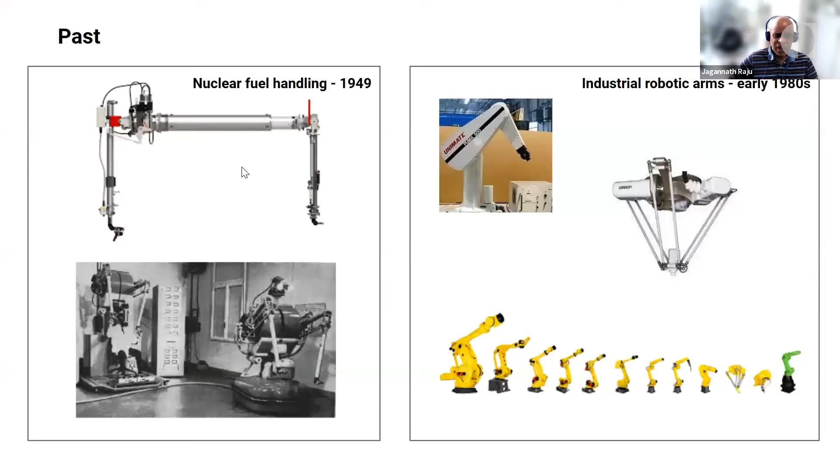In terms of geographical context, mainly it's going to be global. I will dwell a bit on the Indian context, and I have consciously chosen applications in agriculture to focus on in the Indian context, because all the other cases, our use in India just mirrors what is done abroad, but just on a smaller scale. So it doesn't make any sense to really do that on the industrial level. But I think our agricultural space is quite different from what you will see globally, and that's where it makes some sense.

So starting with the first slide, I think the credit for the first really what you could call a robot, I mean now you could call it a robot, is what is the most dexterous limb that we have is an arm.

There was a group called Central Research Labs in 1949, formed by a team of 3 people who built these master slave manipulators to handle radioactive fuel. The left side of this robotic arm is the master, which a person handles in a very safe area, and all the transmission happens through that through-tube to the right side, which handles the radioactive fuel. This was a way of protecting people from the radioactive impact of handling radioactive fuel.

It was purely mechanical. There were cables going through from one side to the other. One would be surprised that even with cables you could get a sense of touch - if you gripped something there, you would feel it on your side that you had gripped something. It all depended on the stiffness of the transmission, and it was pretty good.

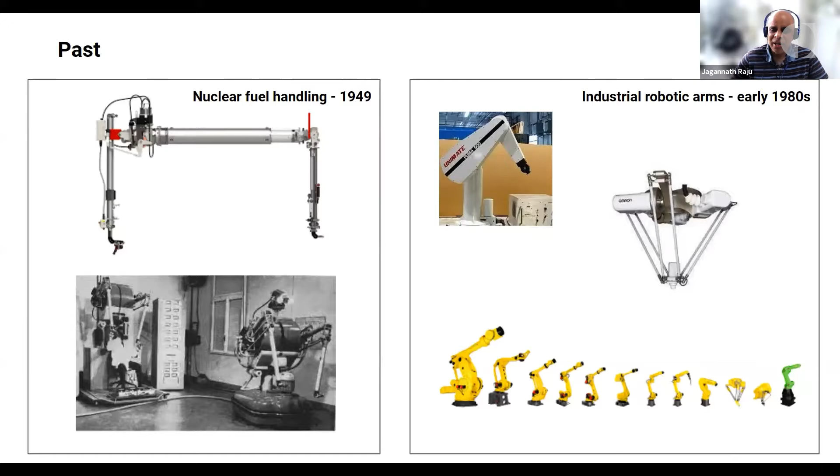So all this portfolio is there. The reason I've put all this in the past is the Fanuc arms now are a bit different than they were 10 or 15 years ago. They're maybe more lightweight, they look more sleek, they use more modern components, but otherwise functionally they're almost the same, which is why I consider that in a sense to be the past. Next, Siddhant.

I think the autonomous vehicle thing actually started with the DARPA challenge, around 2005 to 2007. If you look at the image there, you can see how many sensors were on a vehicle for it to try to complete the challenge. This was a challenge where it had to complete the entire route, somewhere in the western part of the US, without any manual intervention. It was successfully done in 2005, and then multiple teams completed it in 2007.

Then there is the Boston Dynamics Big Dog, which is viral on the internet - everybody has probably seen videos of it. Again, I put it in the past because there are different versions of it now. It was built for defense applications, and as far as I know it's a shelved project at this point, but it was the beginnings of legged locomotion of the kind you see there. It's completely integrated, there are no tethers anywhere, and it carries its own power source.

The other one below that is, again, iRobot's PackBot, dated around 1998. iRobot sold their entire military division in 2016. I think somebody else still sells and markets it, but there's not too much. There are many other things that have come up for bomb disposal and stuff.

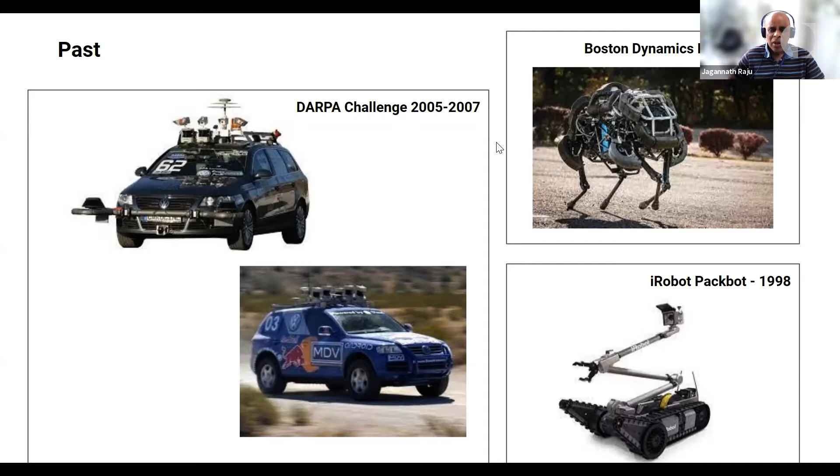I'm going to go off track a bit and talk about Hollywood, which gave a lot of people their first idea of what robotics could be. I'm not sure if anybody in the audience remembers the movie Jaws, unless you're my age. Jaws was interesting because what they used for filming was actually a mechanical shark, which had all the movements and everything inside. That picture shows how many mechanisms were inside to pull off very natural motions that a shark would have.

And it was used extensively. I think they built 3 or 4 of them for the filming. It's probably still there in Universal City if people go and visit.

The one which had more appeal was probably Terminator, because it went through a whole series of them. You can see how highly detailed it is, really the beginning of animatronics. It may not have been autonomous, it was still choreographed, but the mechanisms they could put together made it realistic, where the eyes would blink and glance sideways and all that kind of stuff.

I believe right now this prototype that was built is up for auction somewhere. I've not checked who bought it, but it's available for enthusiasts who want to see what was used in that movie. Some people may ask me, what about Star Wars?

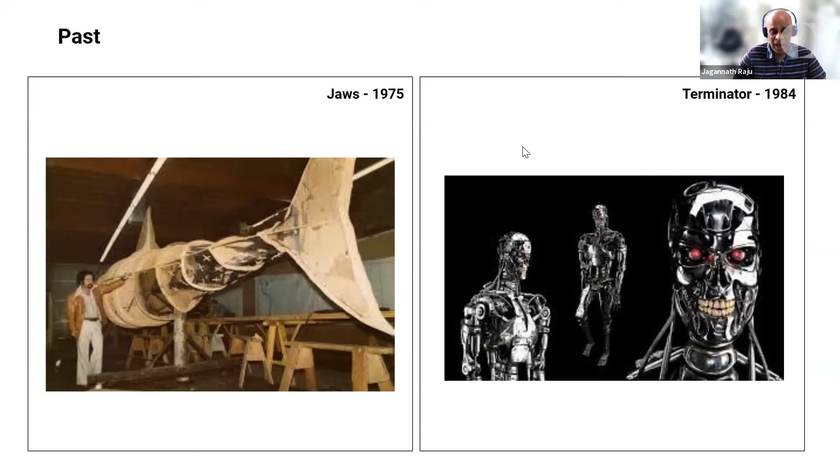And I think that impact from Hollywood actually grows further as their capabilities grow. But a lot of it has now shifted to simulation and computer graphics rather than actually building these prototypes. That's the transition that has happened, which is why this is again in the past.

This one I had a question mark about when I put it in the past. I'm now going to a small context which is Indian, and I've actually been involved in some of this. Coconut harvesting has always been a profession in the southern part of India, so families taught their kids how to do it so they could continue the family profession. Of course, with migration and all, there are very few people left in the southern state of Kerala now willing to climb trees to harvest coconuts.

So the Kerala government has been looking for many years, at least 10 to 15, for solutions. When they first talked to me, it was almost 15 years ago, and they've been trying to build these solutions. What you see on the left is actually a wheeled vehicle going up.

The question, first of all, is about the wheeled vehicles. For people who've done the analysis of this, coming from an academic background, you'll understand that the minute you do a wheeled vehicle and try to grip harder, you need more torque. And the minute you need more torque, you need a bigger motor, which makes it heavier. So I've never seen one of these work successfully, but people have persisted with it.

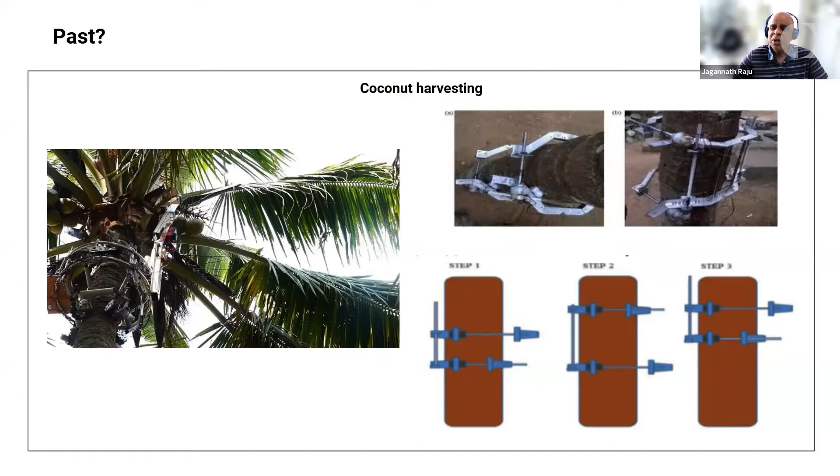Indian industrial robotics adoption is not very high compared to global levels. Primarily, auto companies use them for welding and painting, and affordability has been the main issue. Only big companies could afford it, so it's on a much smaller scale. If what goes on abroad goes on in India, you will see industrial robotics on the shop floor, but mainly for welding and painting.

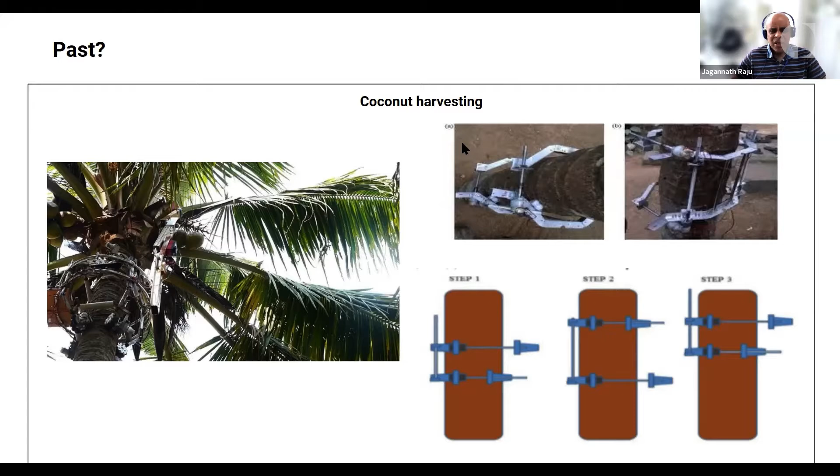So from here, Siddhant, can you go next please? So I'm moving to the present.

So what has happened in the industrial robotics space? As I said, all of them have been conventional robots or robotic arms. The new buzzword in robotic arms is something called a collaborative robotic arm, or cobot for short. This was pioneered by Universal Robots of Denmark around the mid-2000s. Universal is now owned by Teradyne of the US, acquired about 5-6 years back.

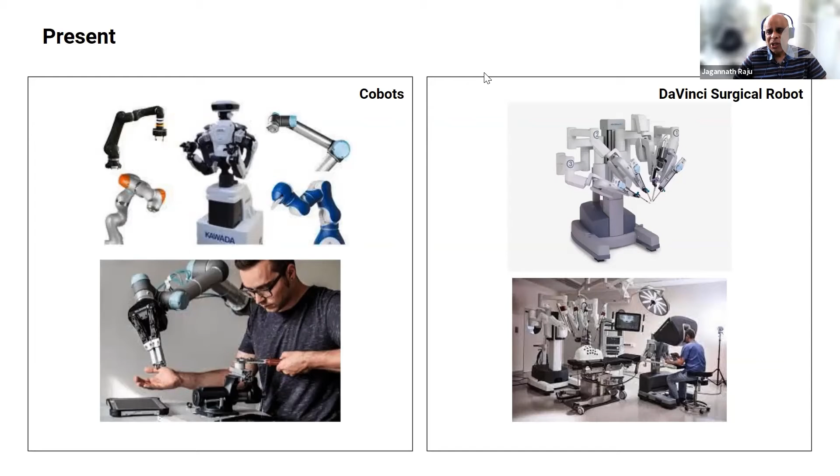What one means by collaboration is what you see in the picture below: a human would work next to the robot without feeling any sense of danger that the robot would collide and injure the person. The human is doing a task that's probably much more difficult for the robot to do, and the robot is doing the task that's much easier for it, a very repetitive task. It just brings it to the person, who takes over and does something else.

This is the first level of collaboration that people are thinking of, where you prevent any kind of serious injury. Collision still happens when it happens, but the collaborative robotic arms are designed to sense the collision and drain all the energy out of the system so that you don't injure the person.

As we move to the next level, people will come up with sensing systems. They're already there, but they haven't been built into the system yet because it requires integration from many sources. That will be the next level of collaboration, where they will know each other's presence and won't collide. The robot will take evasive action if it senses a person in the way, and then will work out a new path autonomously, saying it needs to go around because this person's hand is in the way. So there are many manufacturers of cobots now.

Since 2005, every major company in the world is now producing collaborative robots, and its use has spread like wildfire. It's no longer used only in industrial applications. Now people use it for flipping burgers, putting toppings on pizzas. It's only one's imagination that constrains what you want to do with it. This space is growing at maybe a 50% growth rate year on year for the next few years, and is really the hot space in the robotic arm field.

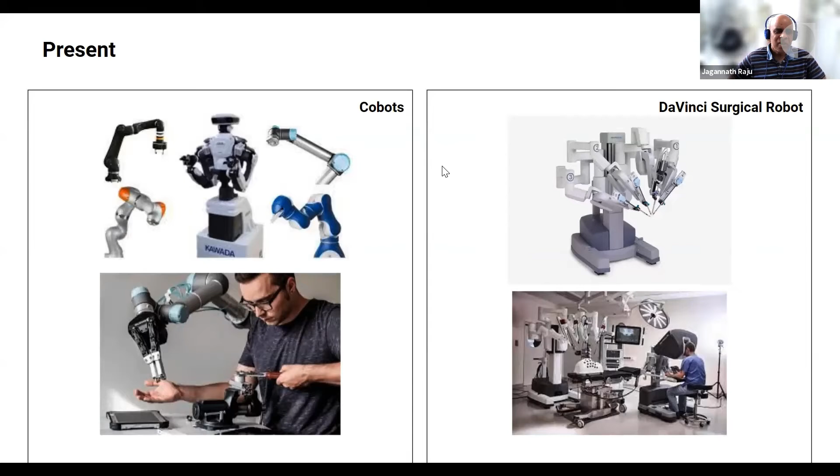Another space that is actually booming is e-commerce. E-commerce means everything you buy is in a warehouse, hopefully close by, so they can ship it to you in a day. If not, they send it from other places. There is no way that with the current e-commerce range of sales, this could be done humanly. So you will see a whole bunch of mobile platforms running all over the floor, carrying pallets from one place to another. Everything is integrated.

The first company that did this was Kiva Systems in Boston, which was acquired by Amazon. It's now Amazon Robotics. It's graduating to where now they're starting to put robotic arms onto the vehicles so that not only can it run around, it can also pick stuff from shelves. Not that prevalent yet, but I think it will slowly pick up as the need arises. It's much more expensive than just having that mobile platform, so there will be cost issues related to that.

That's in warehouses. In homes, iRobot's Roomba has been around for, I don't know, 20 years now. It's again a company that came out of the Boston robotics ecosystem. I never really felt it would have much of a market in India, given the kind of environments we have. But you would be surprised - when the pandemic happened, all the iRobot models in India went out of stock. You had to wait, or find somebody you knew in iRobot to give a call. People called me up and said, do you know anybody in iRobot? I said, I do know people in iRobot, but I don't think that will solve any problems. You got to learn how to sweep and don't wait for the Roomba to show up.

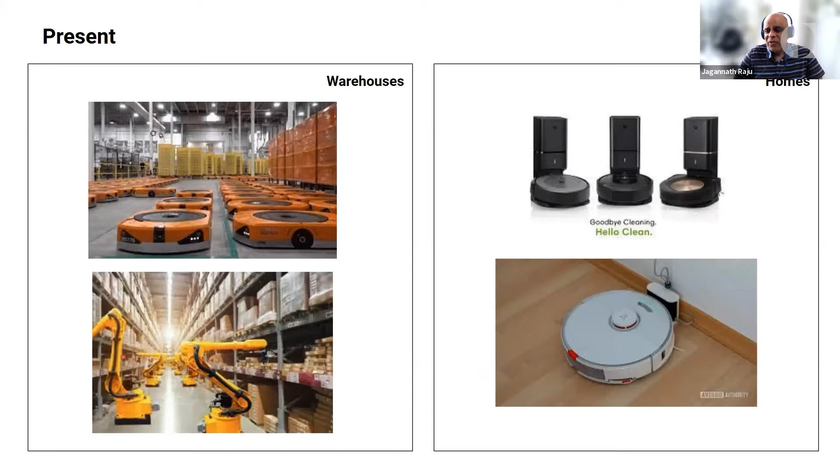This is the one I wanted to show. I was debating whether to put it in present or past, and I'll tell you why. This is a very ambitious effort by SoftBank to create the first human-looking robot that people would be comfortable interacting with. The whole idea was, could you use this? So a lot of banks bought this Pepper to put in their reception and handle customer service at the earliest level, like, may I show you somewhere? Do you have a question? And IBM partnered with SoftBank and connected it in the cloud with IBM Watson.

So in real time, you were having IBM Watson handle queries, figure out responses, and send it back. This is something that was very aspirational during the pandemic. The third picture I have at the bottom - I guess unemployment hit Pepper also. They could get this whole huge squad of Peppers to cheer at a baseball game. So they just lined them up in the seats because there were no fans and got them to cheer.

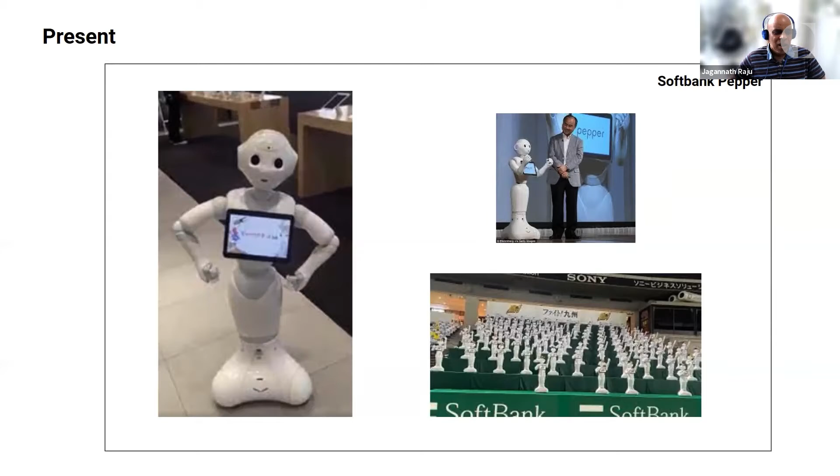The last that I heard is that Pepper is being sort of put in the background. They will go on to other things. They've stopped production of Pepper now. And I think some of the places where it was overreaching, it was one of the early settlers in this space and couldn't handle the expectations that got set up. That's one thing you will find - expectations are very high when you build anything that says it can handle human interaction. They expect it to be human interaction, and anything even slightly off will be jarring for people. So that's one of the things that has come out of this, but I think this will be the platform for people to build future ones, which will actually handle even more sophisticated human interaction. And the next one, Siddhant.

So I was looking for something for the present in the agricultural space for India. And there have been multiple drone companies in India. The first one was ideaForge, which is already probably more than 10 years old.

A lot of the problems really have been regulatory problems. Can you legally fly one of these things? But one of the things that I have seen that people are picking up, and is actually a use case that makes sense, is spraying insecticide, pesticide, or nutricide, whichever way you want to call it, and seeds and stuff like that. This is a very effective use, which can currently be used. There's nothing preventing you, except probably regulation, to use this.

I'm not sure to what extent this is now prevalent, but if you look at agricultural use of drones, this is the most obvious, and the one that can scale up very quickly. I'll talk about other things for the agricultural space in the next one. So this is a brief thing about where I think we are, and as I said, it's a very small sample.

I think the future for robotics is actually still going to be driven from the non-nerd side. It's going to be something that will be a cultural imperative, a social imperative, or part of a strategic way to do things. So I'm going to pass the baton back to Alex to talk about that, so that once we get seeded with various ideas from that space, we can see what is it that we can do with all the technology we have put together, to realize what the expectations are for the future.

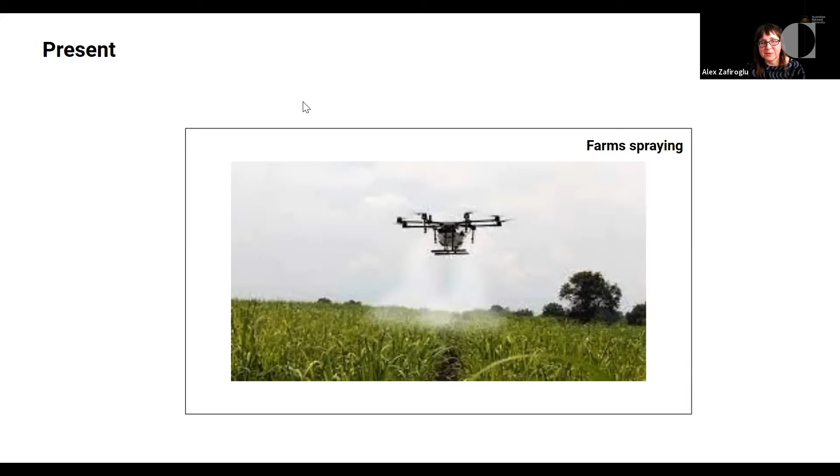Thank you, I think it's an excellent question. Affective computing, you're right, Roz Picard is the person you should be starting with, most definitely. I tend to think about emotion and affect as two sides of the same coin, or that they're not quite the same thing. Affect is kind of the expression of some type of inner state, but it's behavioral, whereas emotion is cultural and psychological. Some of the challenges are understanding the differences between behaviors that are expressions of affect, and how they could be read differently in different parts of the world, but also why we desire to have that type of relationship with the robotic systems that we're building.

So in the next section, I'm going to talk a little bit about that relational aspect. It's that interest in affect that I think is most telling about us, as much as it is about the machines that we create.

From my own recollection, I remember Sony built a small dog called Aibo, which sold very well and was trying to mimic the way you would play with a dog. It would roll over if you touched it or tickled it, and stuff like that.

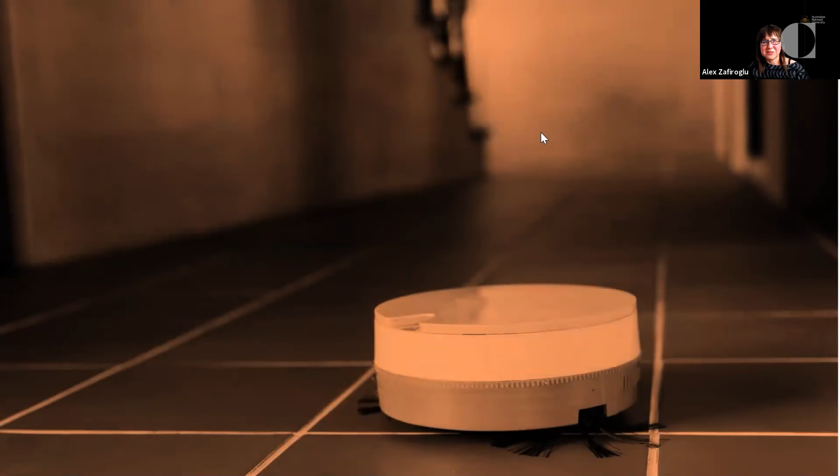If you go to the next slide, we've talked a little about robotic vacuums. I think it was really interesting, some of the examples given earlier around where a lot of robotics research has come from, particularly DARPA in the US, and some of the earlier versions of robotic vacuums being found in military applications around mine sweeping, etc. But also harkening back to what stories we tell ourselves around robotics and what robotics are for.

I'll go back to the story at the very beginning around Talos, and the things we're doing are creating artificial life to do the work of warfare often, or also the work that we do not want to be doing ourselves. But again, when I look at these types of systems, and also the other example I thought was so good — now I'm trying to remember which one it was, because I wrote it down — I think I'll just stick with this one.

These robotic vacuum cleaners are sensing the environment and picking up dirt, etc. But the advanced ones are dependent on creating maps of the space, and these maps are one of the byproducts of running the robotic object, and they have value in themselves.

In the US, and I'm sure in other parts of the world, there are debates around who owns that data and what's being done with it, and all sorts of things around privacy that you might not think you need to consider when you're just thinking about whether it's picking up the dirt from your flooring. So it's useful to think about: that robot isn't just in your house. It's in lots of other places because of the infrastructure necessary to make it run.

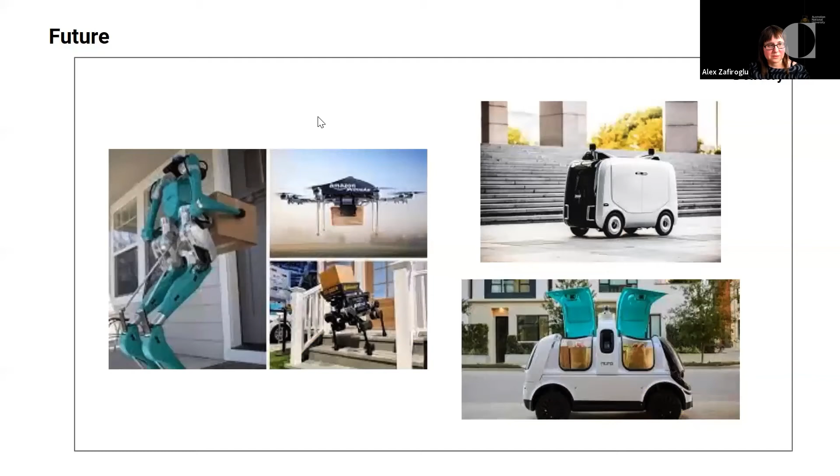You will notice that I've not put timelines on these. I couldn't locate the right astrological charts for it yet. As I mentioned earlier, some of these are already in pilot. This is one of the big things abroad, that you will do delivery. It could be bipeds, drones, multi-legged, wheeled vehicles, lots of many things. Some of these are already being tested out. There is one company, the commercial viability is, I would say, yet to be established completely.

And there was a company that was actually delivering pizzas in California that were not only delivered with the van, but the robotic arms were in the van baking the pizzas. So that as soon as it reached the doorstep, it came from the oven and was put in your hands. It was a great idea, but didn't pan out finally, and I think they closed down.

So this is something that I think slowly will work out. A lot of it will have to do with regulatory practices. I don't see any of this happening in India at this point. Basically, autonomous vehicles, we are still a long way to have stuff to do that. The drones part, I think in India is being used for delivering medical supplies kind of stuff. That's being explored. Otherwise, the rest of it is still something that will stay abroad for quite some time. But delivery is definitely a big space for the future for people building robotic systems.

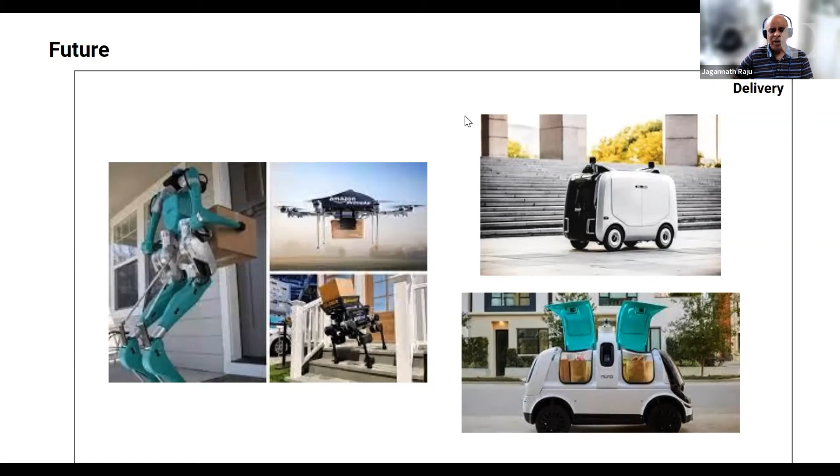And as someone mentioned, Boston Dynamics Atlas. The reason I put it in the future is there has been an Atlas earlier, but it was very primitive compared to what is available now. It can do a tango, it can do all kinds of dancing. There are viral videos about it. So this is definitely what will be in the future. What kind of applications will be suitable for it? People will figure it out.

The same thing for Big Dog, has basically streamlined, looks more, I wouldn't say like a dog, but at least the sense that it is trotting like a dog more in a sense. So Spot is there. Atlas was used extensively by the DARPA challenge people about 5-6 years ago. So they got a lot of feedback from that to be able to take it to the next level, where now it starts to do things like, you can just see the videos online. It shows the extent to which it has become really agile and dexterous and stuff.

The other android in the future is the NASA one, which has been built for space. And like anything else, a lot of the technology that has gone into the Valkyrie will slowly trickle down into a lot of other civilian use at a more affordable level. So that's really what happens with a lot of these projects, that they all end up that way.

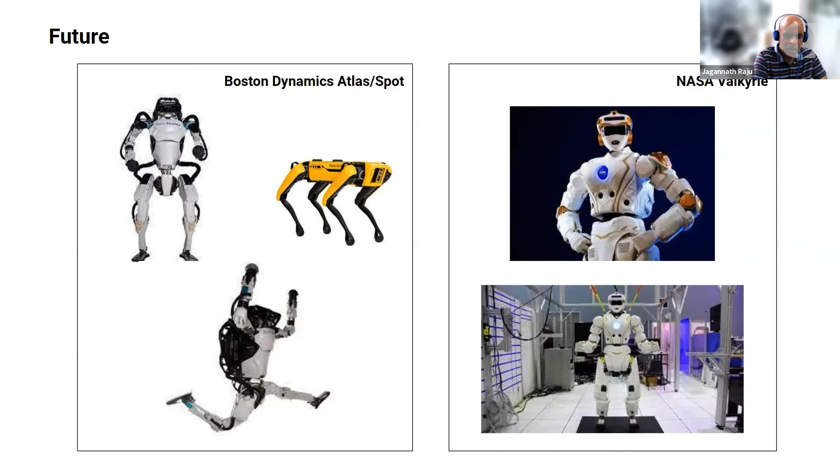This is something really, I don't think too many people know about it, but there's a German company called Festo, which was in the pneumatic space. They have been inspired to build bionic robots. Anybody who has not seen these, please go look at the videos. They have everything from spiders to butterflies to flying foxes, or they look like bats, elephant trunks. All these have been bio-inspired. And there was a mention about soft robotics. A lot of soft robotics is what Festo is working on. And this is one of the things that may not be immediate applications, but it will build technologies that will find uses as people realize what the potential of these things is, that these kind of things can be done. People will start working out how to leverage this.

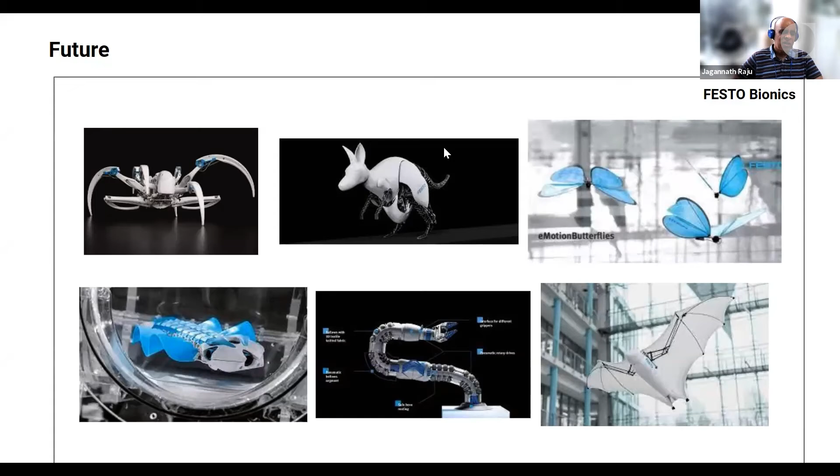And the last slide I have on the future is, again, coming back to India. Again, I'm focusing on agriculture. Farm labor is a very big problem because of migration. Tasks in the hot sun are very, very hard. Nobody really would want to do it in real life. And there's upward mobility of the next generation. They are not going to be sitting there in the village. They want to move. Upward mobility is there. These are all issues. So one of the things we can think of is, why not take technology back to the farms? So people who want to build all these things, they don't have to be in cities to develop this technology. They're developing technology that they can use directly.

You will already see a lot of small farming moving into greenhouses or net houses. Net houses are a lighter version of a greenhouse. And farming there, because you don't have to suffer the vagaries of the weather, you can really have very high, very efficient production.

The potential to automate to a small extent, and maybe some kind of autonomous work like sensing which fruit are now ripe and need to be picked. All things that have large potential in India that people are already working on. The bottom right picture is a cotton picking robot done by a company called GRoboMac.

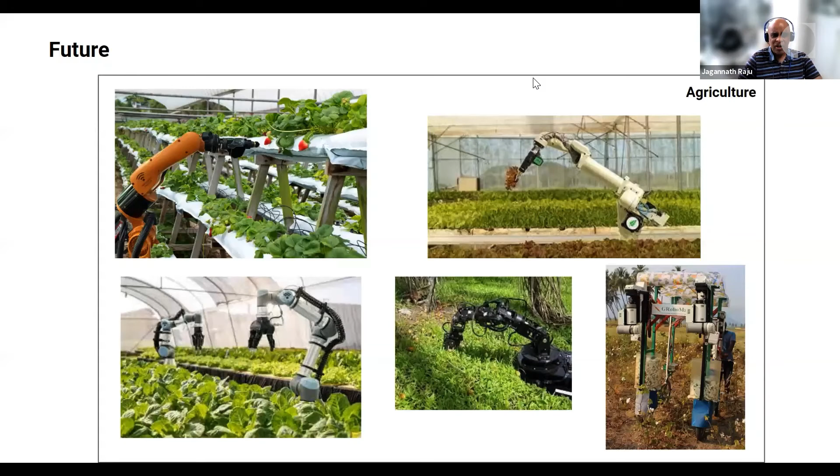Nobody will have the way to do that, so those regulatory things will still take some time. I don't think anybody at this point is talking about regulatory systems for autonomous vehicles as of yet.

The main thing is there's support needed to help with a lot of this stuff, whether it's building humanoid robots and all. US, China, and the European Union all have published roadmaps for robotics.

They have published it. There was an effort in India. An Indian professor in the US got IEEE to work on this, and a whole bunch of us volunteered to be on these committees and worked on it for a year. But nothing came of it finally, because at the end of the day, there has to be strong, proactive engagement from the government. It cannot be something where it says, go do it, and then we'll look at it.

Because a lot of people at the beginning will say, yeah, we'll do it, and then nothing happens. They'll never come back to the table again, saying we're not going to spend. We did spend almost a year trying to pull this roadmap for robotics together. I chaired the manufacturing section.

There was a group that looked at agriculture, a group that looked at medical, we looked at all the different things. But finally, we did not get a roadmap out of it because there was no confidence level that it would finally result in something, because without engagement from the government, these roadmaps will not happen. If you look at the roadmaps of the US, China and the EU, they have very deep engagement from the federal governments of all three places, such that they have said, this is a roadmap, this is how we are going to support you, and this is what you can expect from us.

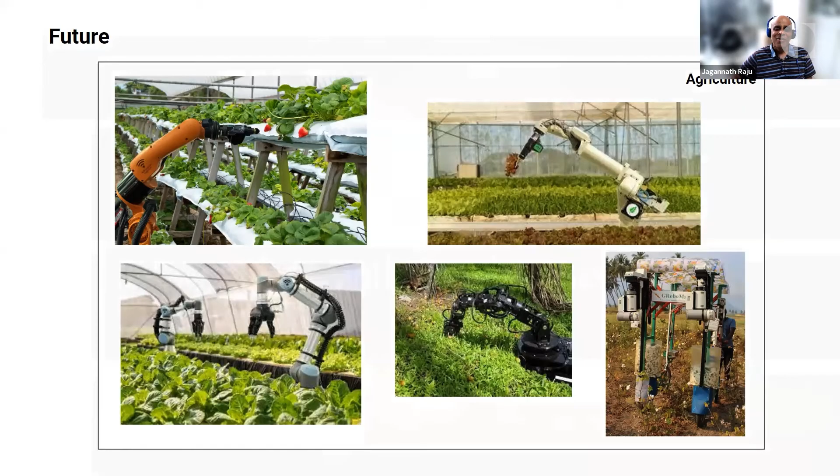Thank you. Those were such excellent examples, particularly the one around the pizza delivery and the salad, and some of the other ones around net houses and greenhouses in India. I think what I'd like us to end on is to think about what kind of future it is that we're choosing, and if robots and cyber physical systems take a tremendous amount of investment and a broad skill set to make them viable, to really think about what's required there and what we are choosing to make viable.

We are the ones that choose what we're going to invest in. Some of the topics that you brought up around advanced manufacturing, healthcare, agriculture, logistics, and transportation seem to be the right areas.

When I say logistics and transportation, I don't really mean delivering hot pizzas directly to someone's door, which is a nice pet project, but not going to solve the types of problems we have at the moment around feeding everybody, climate change, global logistics systems, et cetera.

There are big things afoot, and we should be thinking about where we want to put our resources. Consumer products are nice, but what do we really need to extend and replace human labor, and at what costs?